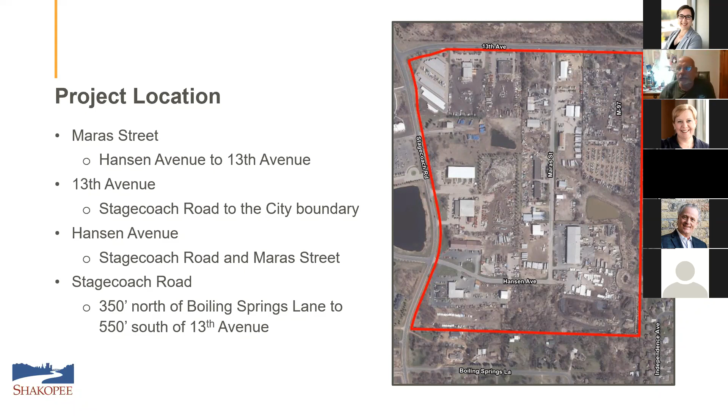So 13th Avenue, Maras Street, and Hansen Avenue are urbanized streets, meaning they have concrete curb and gutter and some storm sewer. The properties in this area are currently served by well and septic systems, and with the exception of the water main in the northwest corner of the project area, there is no existing water main or sanitary sewer. The project is proposed due to concerns with non-compliant septic systems, potential groundwater contamination, and the condition of some of the roads within the project area.

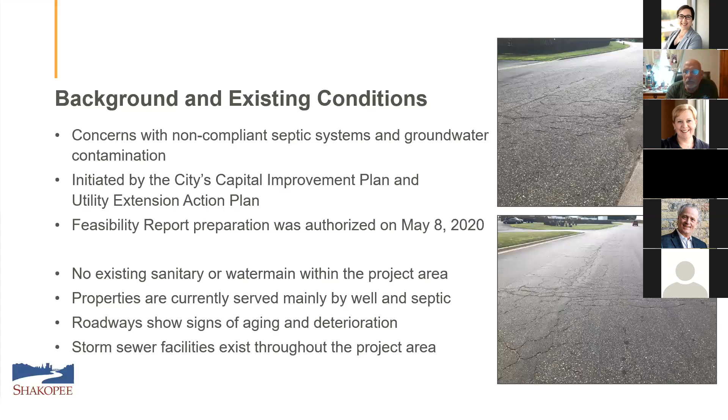The project has been included in the city's capital improvement plan and utility extension plan, and the feasibility report is being prepared to provide the city with more detailed information about the project. We're still fairly early on within this project as far as design and in the preliminary project information gathering stage.

The proposed improvements in the project area include the extension of sanitary sewer and water main within Maras Street, Hansen Avenue, and 13th Avenue through an open cut installation, meaning that the street will be dug up, utilities installed, and the streets reconstructed. The water main and sanitary sewer are proposed to be installed along the east side of Stagecoach Road as well. These improvements are proposed within the boulevard so that there will be minimum impact to the street.

The project also includes sidewalks and streetlights on Maras Street and Hansen Avenue. I'll now be turning the presentation over to Ed Youngquist with WSB, who will go over the proposed improvements in more detail.

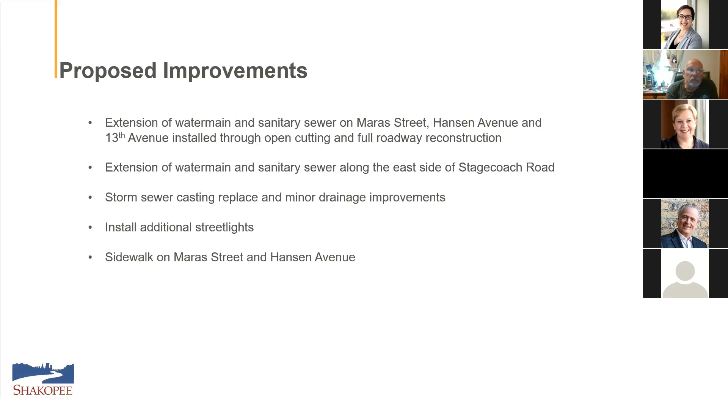We've worked with Shakopee Public Utilities Commission and the city to develop the plan to this point. So I'm going to go over a couple of high-level design elements. First of all, trunk water main proposed in the project is to be zinc-coated 12-inch wrapped ductile iron pipe. So water main within the street is of that material. Hydrant spacing, again, dictated by SPUC, is at intersections and 400-foot maximum spacing.

Throughout the project, there's both commercial and residential properties. So at this point, we have proposed 6-inch PVC sanitary sewer and 6-inch ductile iron water main, again, wrapped and zinc coated for commercial services. Residential services are proposed with the 6-inch sanitary PVC and 1-inch copper.

The proposed sanitary sewer and water main are to be located within the existing curb lines, and typically the sanitary sewer will be centered in the road, and then the water main is going to be located 10 feet either to the south or west, depending upon road orientation. The goal is to minimize disturbance of in-place storm sewer and curb and gutter. We recognize that there are some curb in the project area that will need to be replaced, and storm sewer casting repairs, those sorts of things. And we'll get into that as the design moves along.

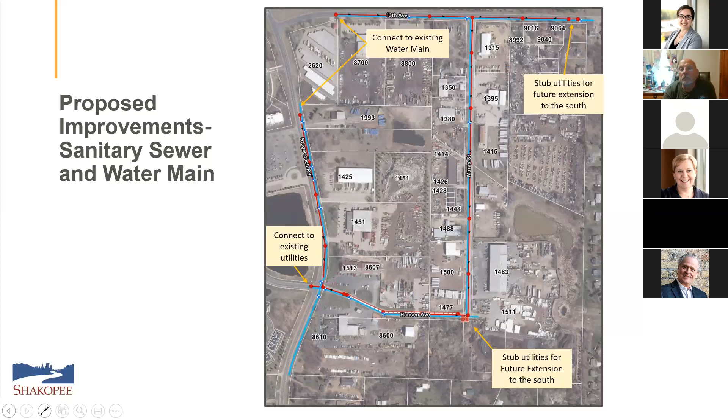Thank you. Along with that, per city design standards, we're proposing street lights. These street lights are to be spaced at intersections and every 450 feet. So we start off by placing them at street intersections and then 450 feet max in between. And then the next slide, Lydia.

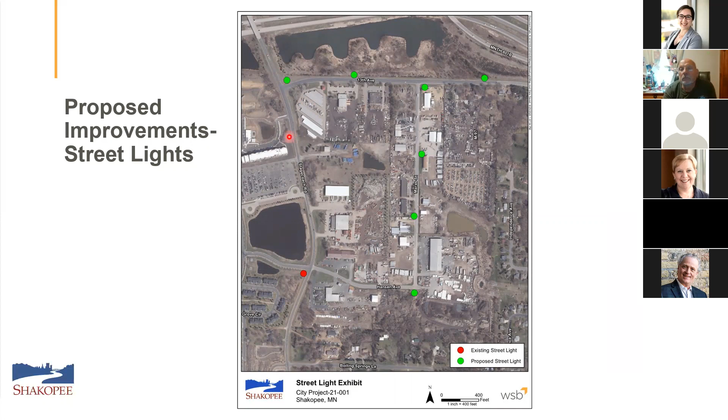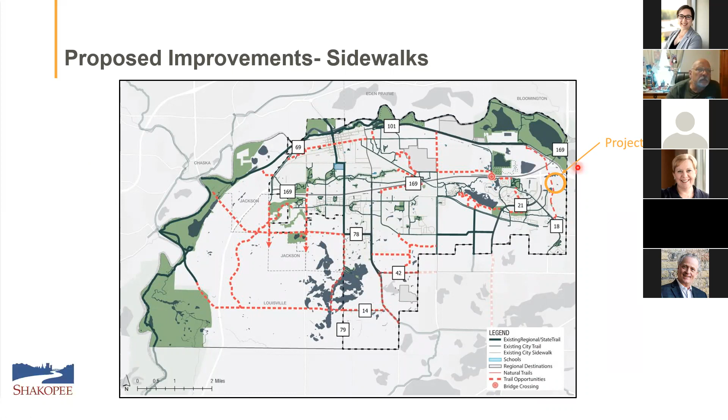Along with this, we do have sidewalk improvement proposed. This slide is the overall city's trail project, and we're showing our project area. This is the city's sidewalk master plan. The next slide, again, just shows where we're located within the city and where the project is. And we've got a sidewalk proposed in this project on the north side of Hansen and on the west side of Maras. And this is proposed to be a 6-foot wide concrete sidewalk. And I believe that is it for me with slides.

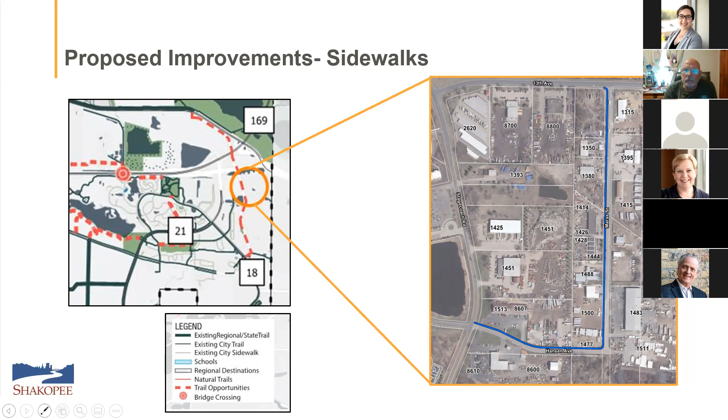Thank you, Ed. This is Allison here again, Allison Fauski. I also just wanted to quickly mention before I continue with the presentation that both the PowerPoint presentation and the recording will be on the city website. So you'll have access to this information so that you're able to look at the presentation as we go through it, and then get a copy of it for your own records so that you have that for your file.

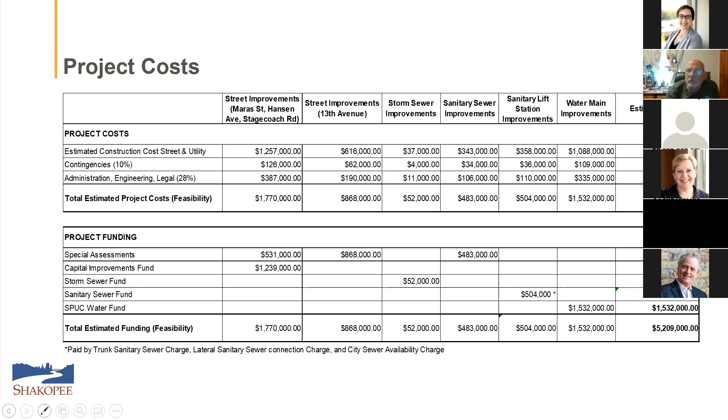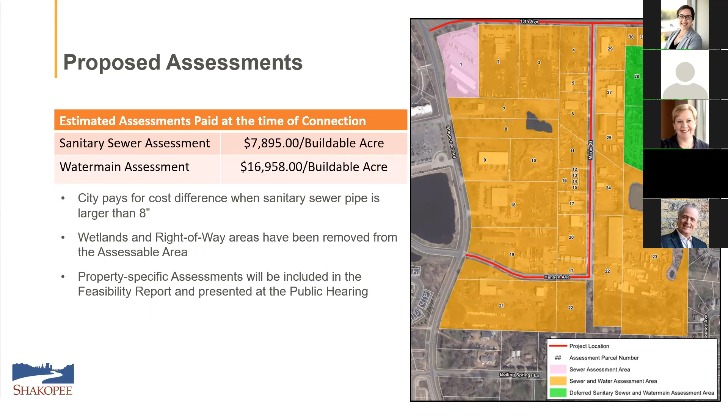As Ed had mentioned, this project includes a sanitary sewer lift station at the corner of Hansen and Maras, and there's an area to the south of the project shown in green on this slide that would benefit from that lift station when sanitary sewer is extended. Therefore, these properties shown in green will be subject to a lateral sanitary sewer connection charge, which would be deferred until these properties are able to connect to the city utilities.

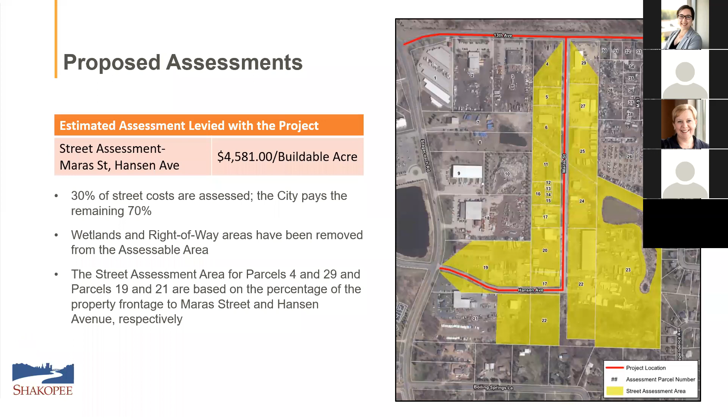All of these sewer treatment facilities in the Metro are owned and operated by the Met Council, and they determine the SAC unit based on the current usage of your facility. But they also look at potential use for redevelopment, et cetera, and SAC units follow those uses. So a car wash or a restaurant would use a lot of water. You're going to have a higher SAC unit than potentially a small office that has just a couple of employees and one bathroom. So we've made an estimation based on acreage, just to provide you kind of a number here of how we determine that SAC unit, but ultimately that's determined by the Met Council. So I hope that helps.